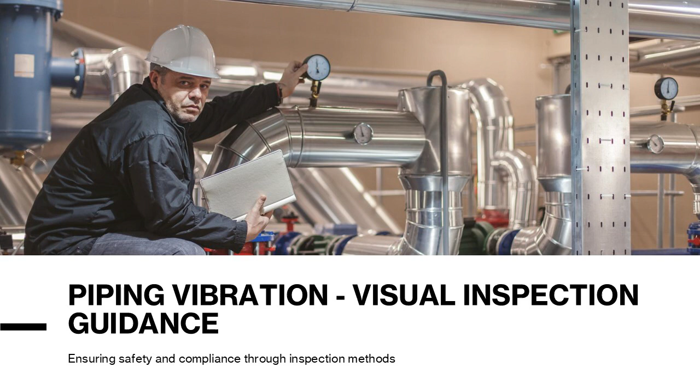Vibration visual inspection of piping guidance, ensuring safety and compliance through inspection methods. This topic refers to guidelines for the avoidance of vibration-induced fatigue failure in process pipework by Energy Institute.

Purpose of vibration visual inspection of piping. Vibration visual inspection of piping systems is a critical preventive measure aimed at identifying potential vibration-induced fatigue issues before they escalate into failures. The primary objective is to detect as-built anomalies, operational conditions that may cause excessive vibration, and signs of wear or damage that compromise structural integrity.

Unlike automated monitoring, visual inspection provides a direct, practical assessment of piping conditions under varying operational states. This approach is particularly important because vibration levels can fluctuate significantly depending on plant operations, such as changes in flow rates, valve positions, and equipment load. Inspectors should conduct surveys during different operating conditions to capture intermittent problems that might otherwise go unnoticed.

The process involves observing physical movement, listening for abnormal noise, and feeling for vibration, all of which indicate potential mechanical stress. Furthermore, visual inspection complements other diagnostic methods by offering immediate insights into geometry, support adequacy, and maintenance practices.

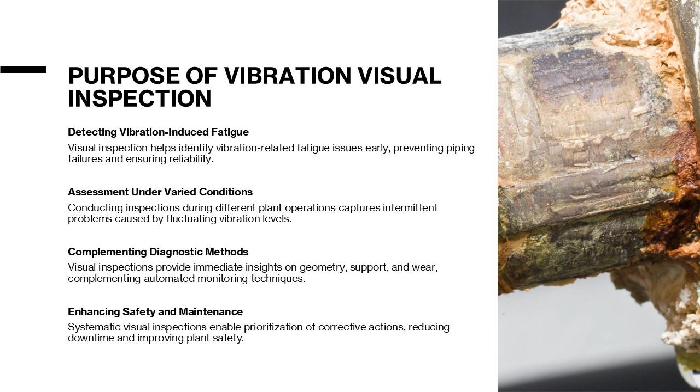By systematically applying these observations, operators can prioritize corrective actions, reduce downtime, and enhance safety. Ultimately, the goal is to maintain piping reliability, prevent fatigue failures, and ensure compliance with industry standards for operational integrity.

Indicators of high vibration and noise, fretting damage, and common locations. High vibration and noise are primary indicators of potential fatigue risk in piping systems. Inspectors should evaluate three distinct aspects: visible movement, tactile vibration, and audible noise.

Visible movement often signals low-frequency vibration, while vibration felt by touch suggests low to medium frequencies. High-pitched noise typically corresponds to high-frequency vibration, which can be particularly damaging over time.

When such conditions are observed, it is essential to document the operating parameters under which they occur, including pressures, temperatures, valve positions, compressor loads, and flow rates. These details help correlate vibration patterns with operational states, enabling targeted mitigation strategies.

Ideally, vibration and noise levels should be quantified using specialized measurement tools, as outlined in related technical modules. However, even without instrumentation, careful observation and documentation during visual inspection provide valuable insights into system health.

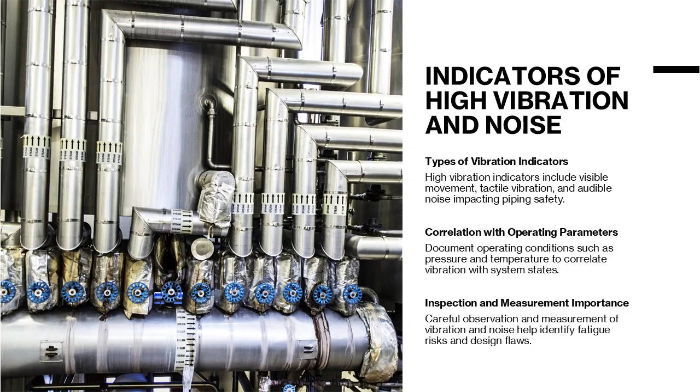Persistent or intermittent vibration issues often point to underlying design flaws, inadequate support, or process-induced excitation, all of which require prompt corrective action to prevent fatigue-related failures. Fretting damage occurs when two surfaces in contact experience relative motion, even if minimal. This phenomenon leads to localized material loss and can significantly weaken piping components.

Common locations prone to fretting include U-bolt clamps without resilient pads, resting supports lacking protective layers, deck penetrations where pipes vibrate against structural edges, and areas with loose insulation cladding. Additional risk points include partial clashes between adjacent pipes in contact with equipment such as cable trays or handrails. Temporary supports like scaffold poles or chains also contribute to fretting when left in place for extended periods.

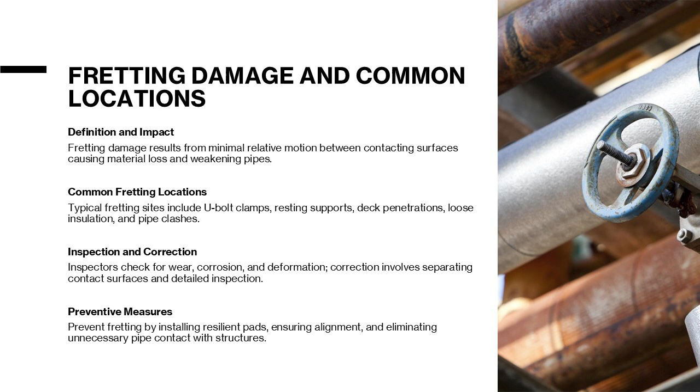Inspectors should look for signs of wear, corrosion, or deformation at these contact points. When fretting is detected, immediate corrective measures involve separating the contacting surfaces and conducting detailed inspections to assess wall thickness loss. Preventive strategies include installing resilient pads, ensuring proper alignment, and eliminating unnecessary contact between pipes and structural elements. Addressing fretting early mitigates fatigue risks and prolongs the service life of piping systems.

Pipe geometry and complexity, small bore connections or SBC geometry. Pipe geometry plays a significant role in determining susceptibility to vibration-induced fatigue. Complex configurations with numerous bends, valves, and fittings tend to generate higher levels of turbulent energy, which amplifies vibration. Thin-walled pipes are particularly vulnerable because they lack the structural rigidity to withstand cyclic stresses.

Inspectors should pay close attention to areas near sources of turbulence, such as control valves or orifice plates, and verify that these sections have adequate support. Plant modifications, such as removing sections of piping, can create unsupported dead legs that further increase vibration risk. Evaluating geometry involves assessing alignment, spacing, and the presence of stress concentrators that could accelerate fatigue.

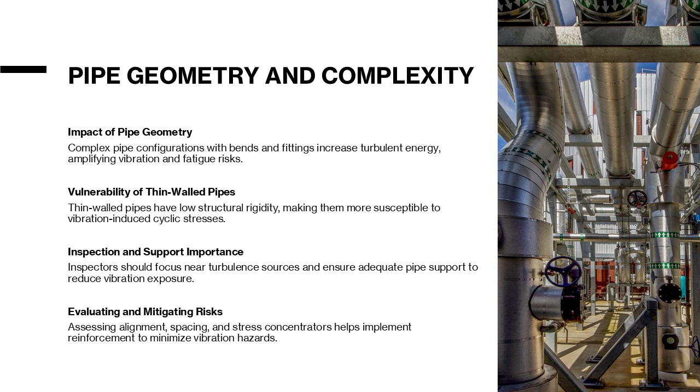By identifying these factors during visual inspection, operators can implement reinforcement measures, adjust support configurations, and reduce vibration exposure. Proper design and maintenance of pipe geometry are essential for ensuring long-term reliability and minimizing operational hazards.

Small bore connections, SBCs, are highly susceptible to fatigue due to their geometry and loading conditions. The type of fitting significantly influences stress concentration at the connection point. Preferred designs include contoured bodies, welded tees, and fully back-welded fittings, while poor practices involve set-on or set-in configurations.

Additional factors include the length of the connection, mass loading at the free end, and diameter reductions along its length. Longer connections with heavy valves or flanges create cantilevered masses that amplify vibration stresses. Thin parent pipe walls, often found in duplex alloys, further exacerbate fatigue vulnerability.

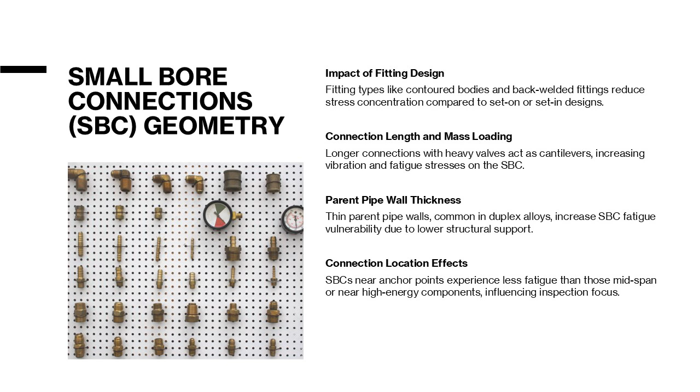The location of the SBC on the parent pipe also matters. Connections near anchor points are less prone to fatigue than those positioned midspan or adjacent to high-energy components. Inspectors should evaluate these parameters carefully and recommend bracing or redesign where necessary. Proper SBC geometry and support are critical for maintaining structural integrity and preventing premature failures.

Pipe supports and their effectiveness, bracing of small bore connections. Effective pipe supports are essential for minimizing vibration and preventing fatigue damage. Visual inspection should identify missing or damaged supports, temporary fixes such as ropes or wooden blocks, and supports that lack sufficient stiffness. Common issues include goalpost structures without cross-bracing and pipe racks with poor lateral stability.

Inspectors should also check whether supports function as intended. For example, thermal expansion may lift pipes off resting supports, creating air gaps that reduce restraint. Spring hangers must be correctly set to maintain proper load distribution. Fretting between pipes and supports is another concern, often resulting from inadequate padding or misalignment.

Addressing these deficiencies involves restoring damaged supports, replacing temporary measures with permanent solutions, and reinforcing weak structures. Regular maintenance and inspection of supports ensure that piping systems remain stable under dynamic loads, reducing the risk of vibration-induced fatigue.

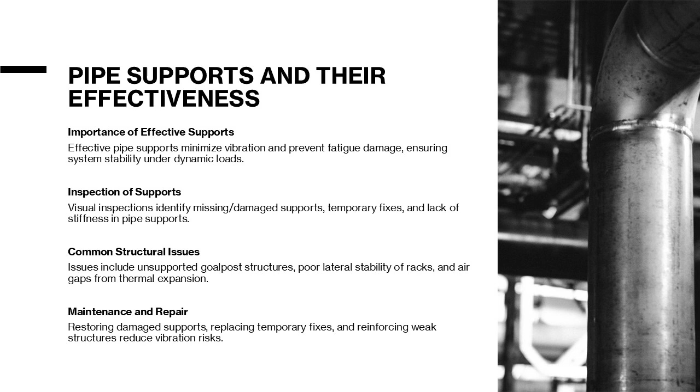Bracing small bore connections is a critical step in mitigating vibration risks, but improper bracing can introduce new problems. Common issues include using unsuitable materials such as ropes or cable ties, applying braces that lack stiffness, and failing to support free masses like valves. Braces that protect only the first weld or restrain the connection in a single plane provide inadequate support.

Additionally, bracing to decks or adjacent structures instead of the parent pipe can lead to combined static and dynamic loading, increasing failure risk. Inspectors should verify that braces are correctly installed, bolts are tight, and gusset plates are reinforced to prevent punch-through on thin-walled pipes. Effective bracing involves securing the entire connection in multiple planes and anchoring it to the parent pipe for optimal stability. Regular checks and maintenance of bracing systems are essential to ensure long-term reliability and safety.

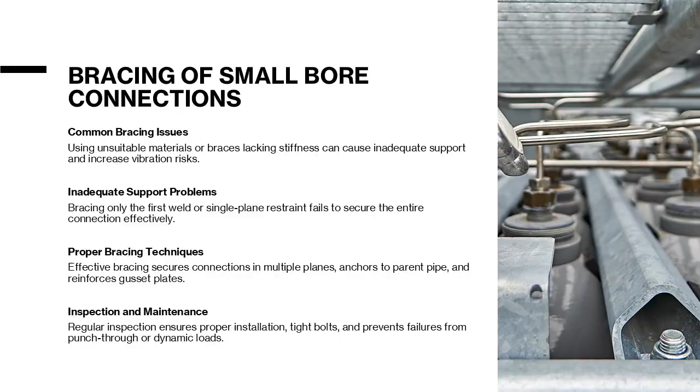Vibration control devices, other considerations, and environmental factors. Several devices can be employed to control vibration in piping systems, including gas-filled pulsation dampeners, viscous dampers, and hydraulic vibration snubbers. Inspectors should confirm that these devices are functioning correctly and have not deteriorated over time. For pulsation dampeners, verifying the correct pre-charge pressure is essential for maintaining effectiveness.

Viscous dampers should be checked for lockup conditions and contamination due to damaged covers. Hydraulic snubbers must be inspected for signs of slackening or seizure, which compromise their ability to absorb dynamic loads. Additionally, vibration can transmit to adjacent pipework through shared supports or machinery skids, creating secondary fatigue risks. Identifying and addressing these transmission paths during visual inspection helps prevent cascading failures across interconnected systems.

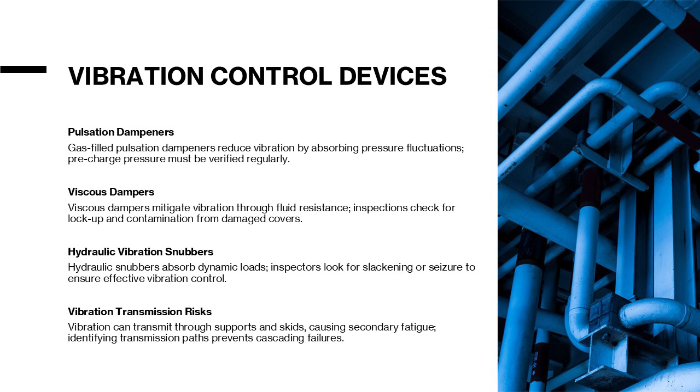Beyond mechanical aspects, several additional factors influence vibration-induced fatigue resistance. Corrosion and erosion weaken pipe walls, reducing their ability to withstand cyclic stresses. Poor weld quality and mechanical damage introduce stress concentrators that accelerate fatigue.

Environmental loading, such as wind, wave action, and seismic forces, can impose dynamic stresses on piping systems, particularly in offshore or exposed installations. Slugging in multiphase flow lines is another excitation mechanism that may not be apparent during routine operation but can cause severe vibration during transient conditions. Inspectors should remain vigilant for these factors and incorporate them into risk assessments. Proactive measures, including corrosion protection, weld quality assurance, and structural reinforcement, are vital for maintaining system integrity under diverse operating and environmental conditions.

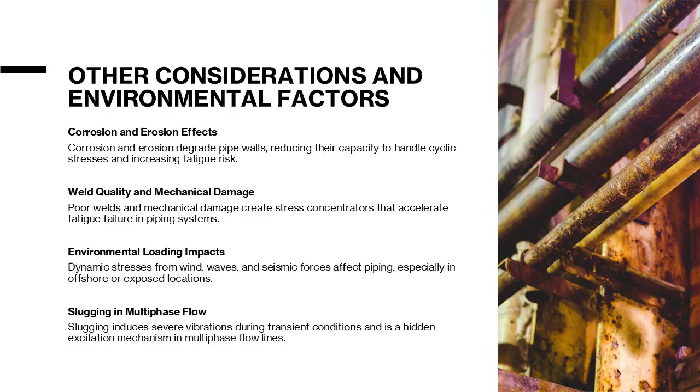Summary and best practices. Visual inspection is a cornerstone of piping integrity management, offering a practical means to identify and mitigate vibration-induced fatigue risks. By systematically evaluating indicators such as vibration, noise, fretting damage, geometry, support adequacy, and bracing effectiveness, inspectors can detect vulnerabilities before they lead to failures. Incorporating checks for control devices, environmental factors, and maintenance quality further enhances reliability.

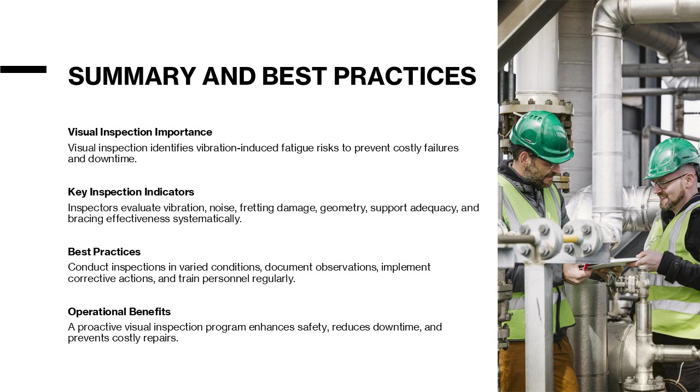Best practices include conducting inspections under varied operating conditions, documenting observations thoroughly, and implementing corrective actions promptly. Regular training for inspection personnel ensures consistency and accuracy in assessments. Ultimately, a proactive visual inspection program reduces downtime, prevents costly repairs, and safeguards personnel and assets, reinforcing its critical role in industrial safety and operational excellence.